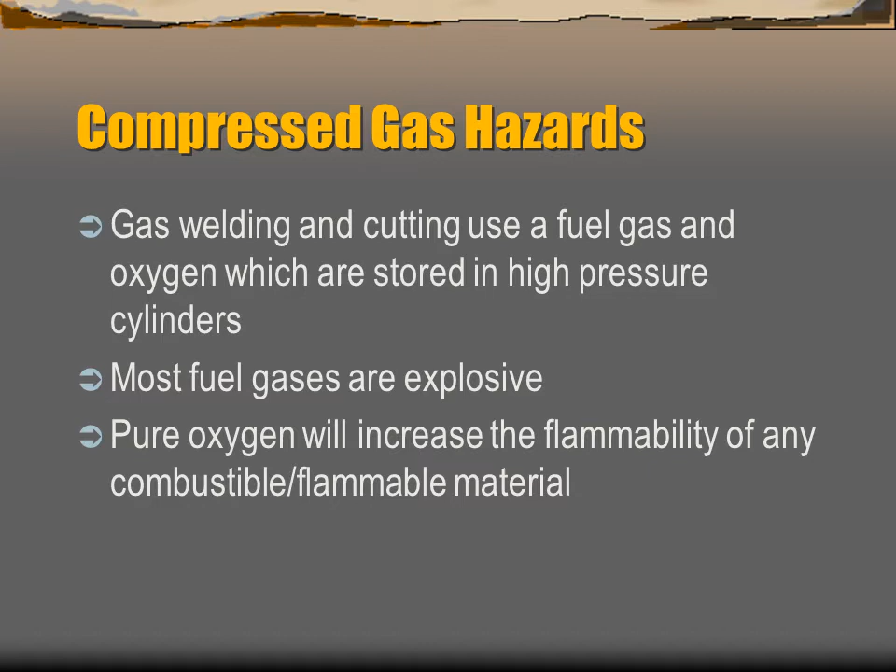We have to identify the hazards and potential hazards before doing the work, and we have to read the MSDS sheet. MSDS means material safety data sheet. It is also known as a product safety data sheet. It is a document that lists the information relating to occupational safety and health for the users of various substances and products.

These sheets are widely used mainly for cataloging information on chemical compounds, chemical mixtures, etc. They also include instructions for safe use and the potential hazards that can come along with the spill handling process. MSDS sheets vary with the country, and cadmium exposure from the welding process is very dangerous.

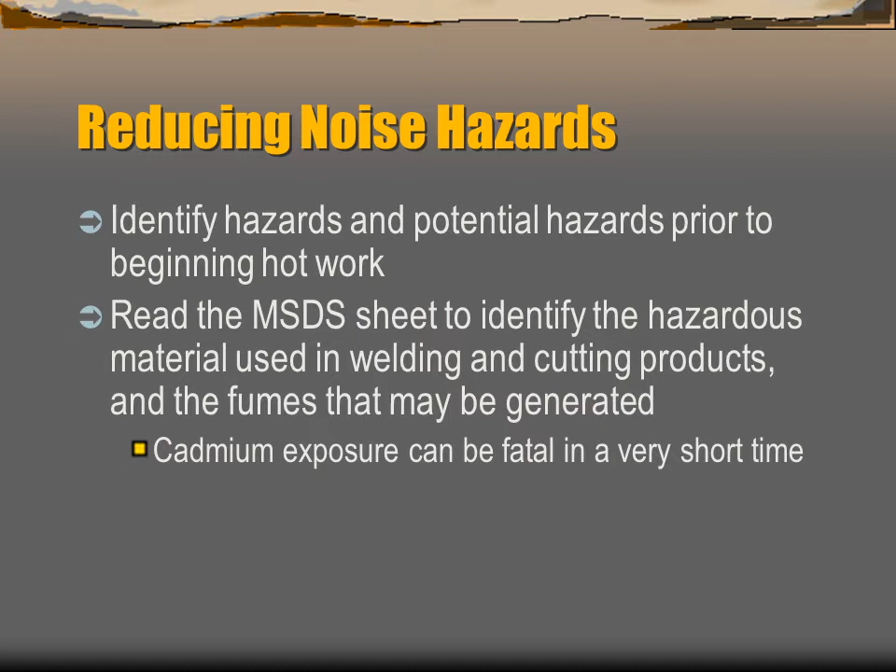All the cylinders have to be protected with caps or regulators. The pressure regulator must be designed for the gas. We have to check all the equipment before doing the welding process. The cylinders should not lay down unattended. They should be stored upright and secured very well, not in an inclined position, always kept upright in a secured place. The oxygen and fuel gas cylinders have to be stored separately, so there is no chance of fires.

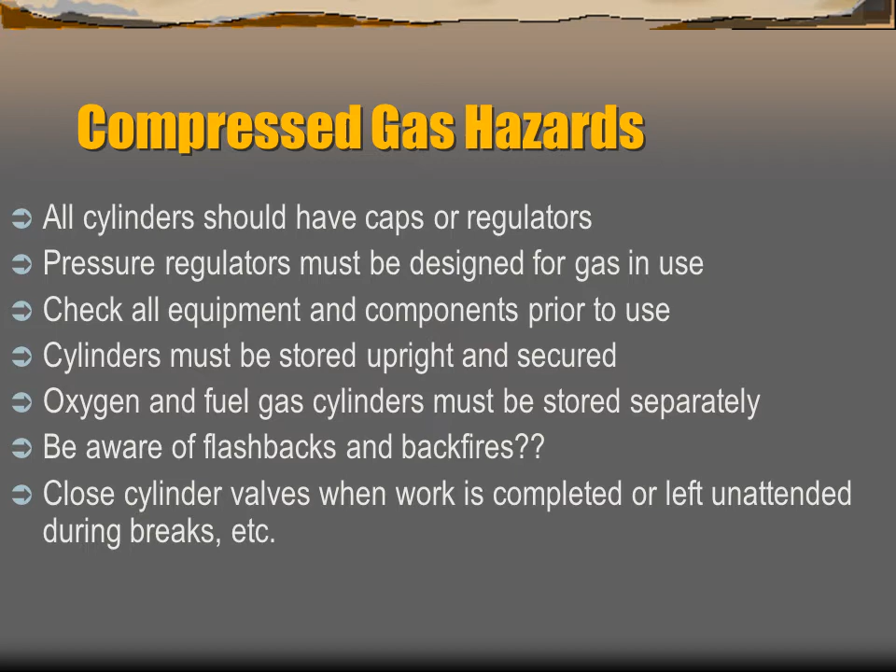We have to close the cylinder valves when the work is completed or left unattended, especially during breaks. Always substitute less hazardous materials for hazardous materials: use cadmium-free silver solders, asbestos-free electrodes, gloves, and hot pads. Use ventilation to move away or dilute the hazards. The welding area should be well ventilated, and we have to use work area barriers to protect others working within the area.

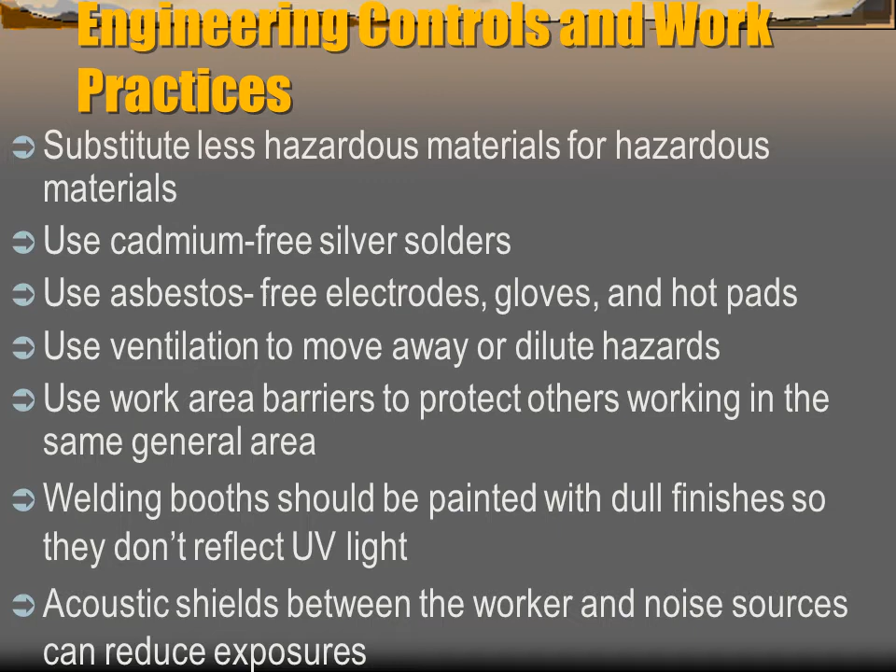The welding booth should be painted with dull finishes to prevent the reflection of UV rays, which are very dangerous for the eyes. Acoustic shields between the worker and the noise sources also reduce exposure, protecting the worker from the noise generated by the welding process. We have to modify the process or follow safe work practices in order to eliminate the hazards.

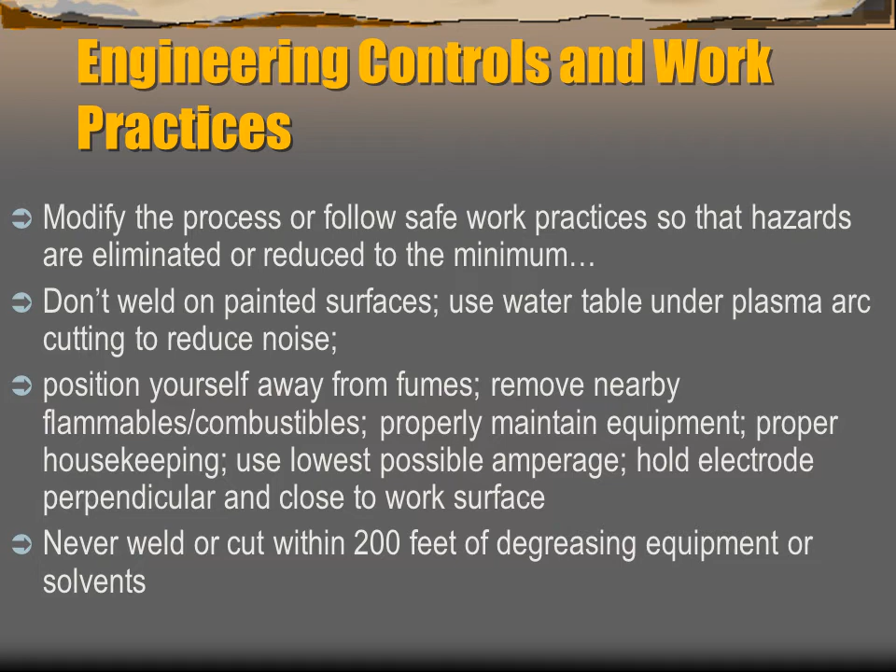We should not weld painted surfaces, and we have to use a water table under plasma arc cutting to reduce the noise. We always have to position ourselves properly: a worker doing welding has to keep away from fumes. He has to remove all flammable and combustible materials from the workplace, and never weld or cut within 200 feet of degreasing equipment or solvents.

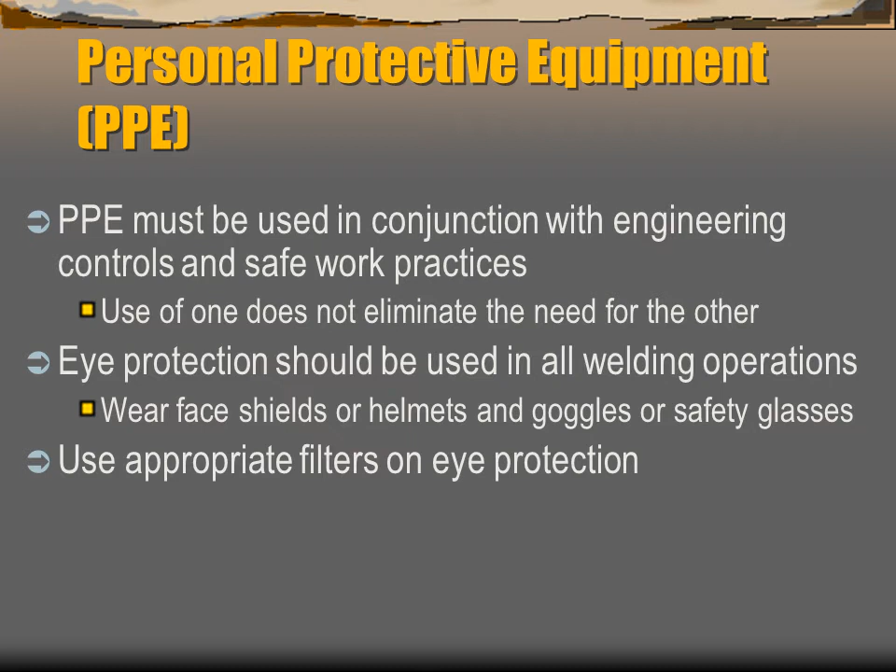Personal protective equipment must be used along with engineering controls and safe work practices. The welder has to be given training on that. He has to use eye shields to protect the eyes, wear face shields, and use appropriate filters for eye protection. All these PPEs he has to use.

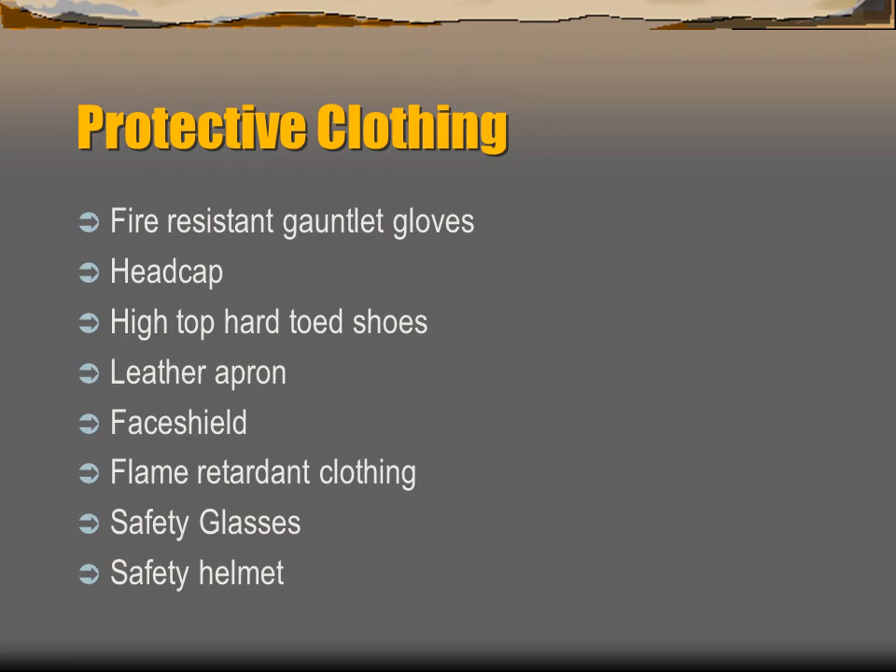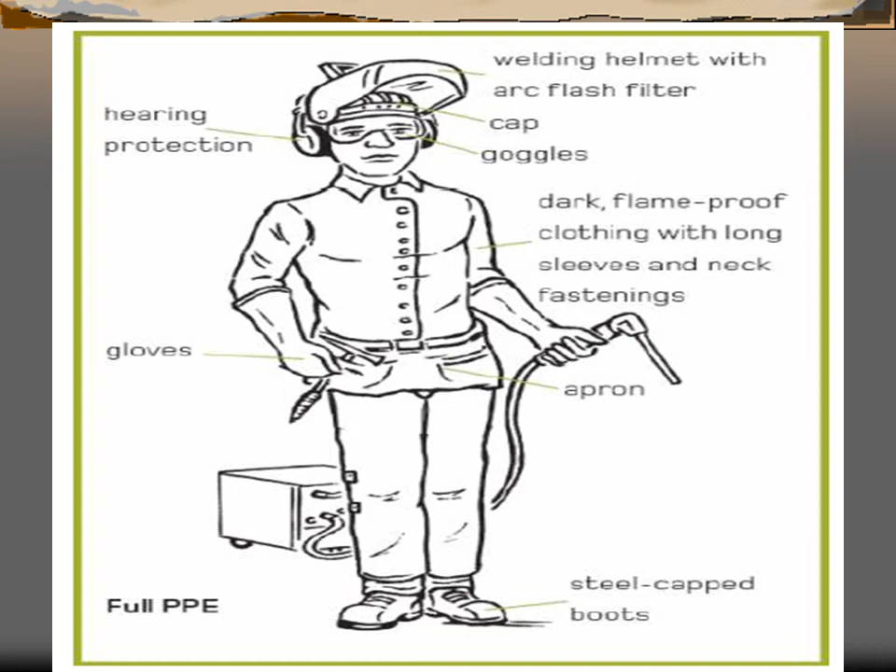Hearing protectors protect the ears, since most welding operations are noisy. Respirators have to be used because there can be hazards within the welding site. The National Institute for Occupational Safety and Health recommends respirators to prevent carcinogens entering the body of the worker.

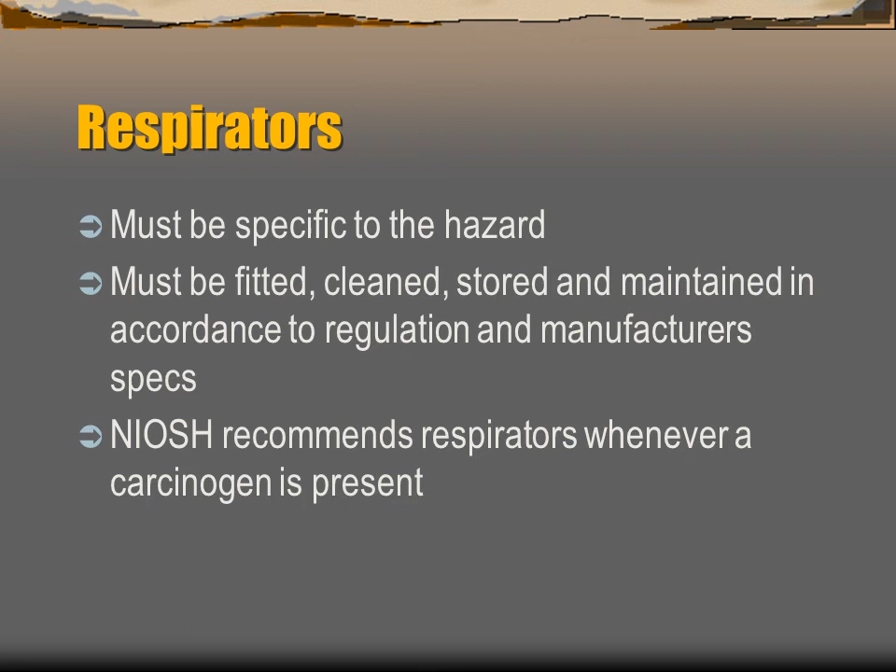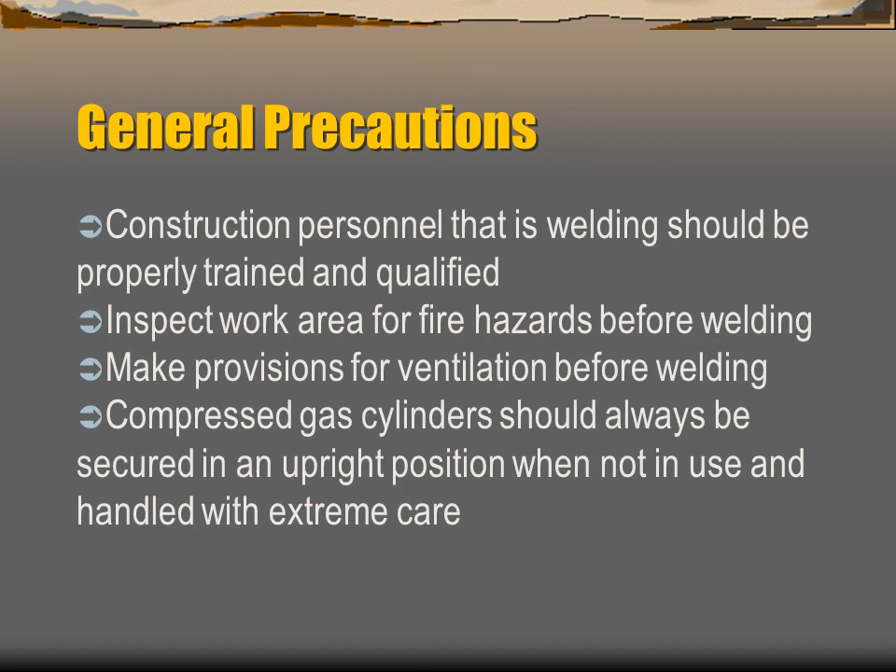Construction personnel doing welding should be properly trained and qualified. Before welding, the worker has to inspect the area, and the space should be sufficient and well ventilated. It is always better to weld in open space. Compressed gas cylinders should always be secured upright, and he has to check for any leakage.

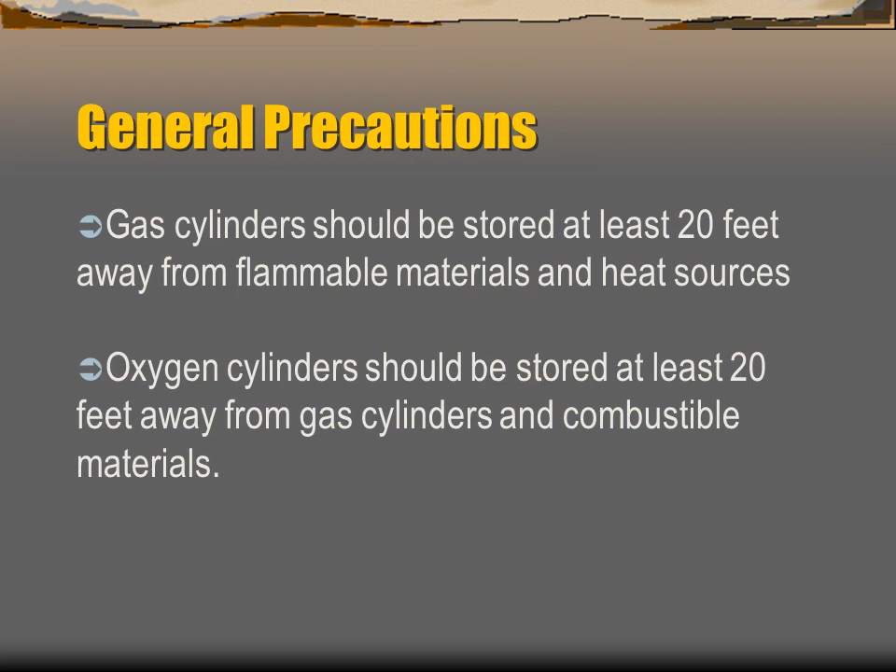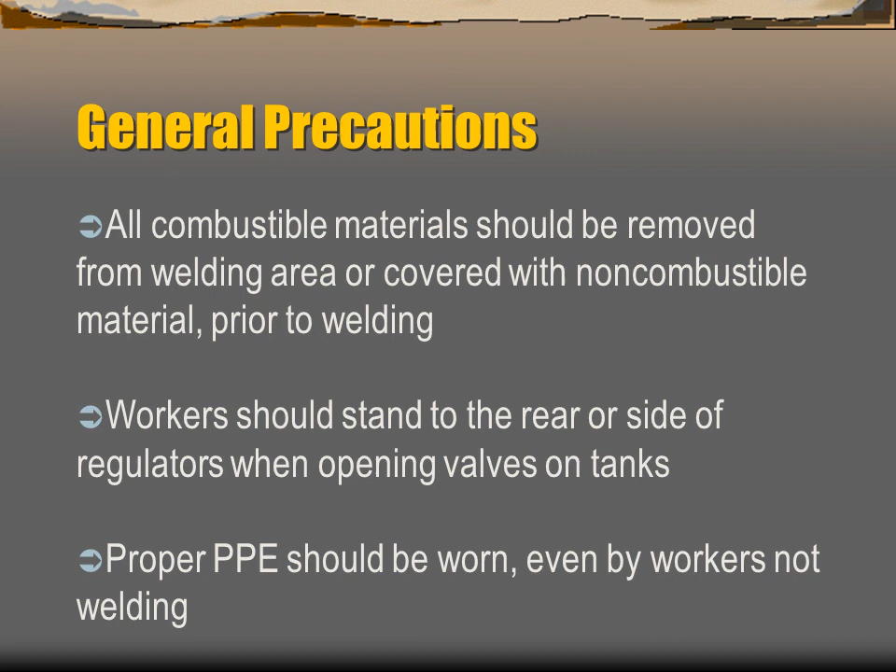Gas cylinders should be stored at least 20 feet away from flammable materials and heat sources. Oxygen cylinders should be stored at least 20 feet away from gas cylinders and combustible materials, because it can create a huge hazard. All combustible materials should be removed from the welding area, the worker should stand to the rear or side of the regulators when opening the tank valves, and he has to wear proper personal protective equipment before starting the welding process.